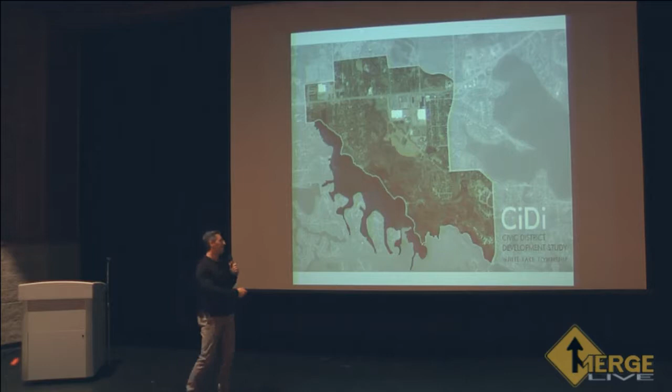We appreciate everybody being back again. For those who might be a little new to this, I'm just going to give a short introduction, and then Eric's going to get into it because there's actually a ton to cover.

The verbal presentation will happen this evening, and then we'll make this presentation available on the city website so you can go through it at your own leisure and study it more. There are also a few boards out there for you to look at tonight, just a snippet of what you're seeing in the slide presentation here. If you have questions about some things you're seeing, we'll be out there for a little while afterwards to familiarize you with anything.

So just to give you a feel of where we are in the process: we started this analysis phase in August, moved through, and had the first community meeting last month on September 13th. We got great feedback from that. If you recall, we presented some initial research and ideas about thinking about the community in general.

We put together two ways to participate. One was a survey, with questions about aspects of the community and potential desires through multiple choice or selected items. We also had an analysis where there was a map that people could put comments on in various parts of the city.

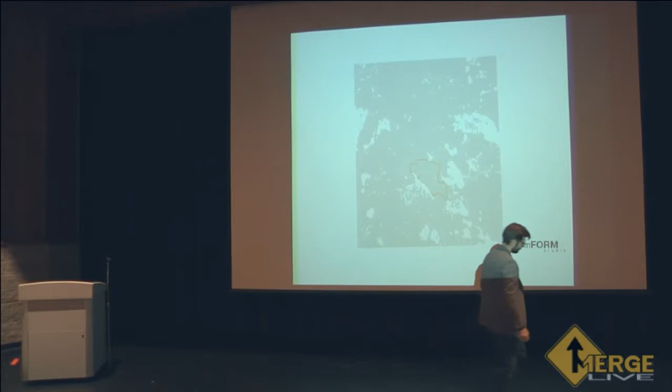Thank you everyone for coming out tonight. We're excited to present these three schemes and the results of the work, the input, and the research we've done so far, and the community feedback we've gotten. It's been really excellent, and I think you'll see that in the outcome of these three schemes, the wonderful opportunities available for this district.

Just to remind everyone, the district we're looking at is this area in the scheme of White Lake Township. So we're looking at a central area of White Lake Township that can potentially start to serve as a downtown identity point, a walkable community within the township.

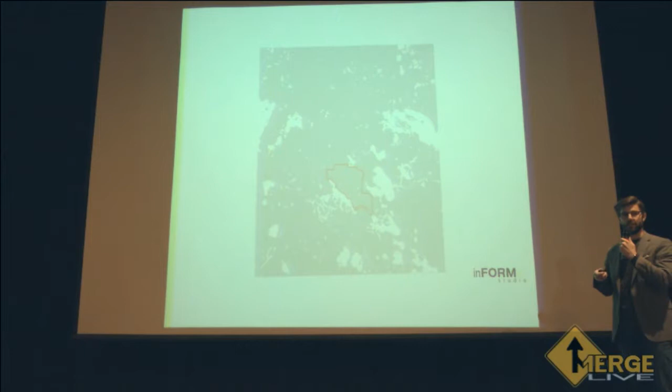Zooming in on the specifics, we are focused on the area right at the intersection of M59 and Elizabeth Lake Road. Right now we have the Kroger here and the JCPenney, so those are the landmarks that identify this area we're looking at specifically.

Part of the reason we looked at this area was the property down here that has been acquired by the library and the township to start developing a civic campus, looking at a new library building, potentially a new municipal complex, police, fire, etc. The idea is that this development would be a catalyst to look at the entire area as a master planning feasibility idea, so that it influences the development around it and starts to create a more walkable community that could serve as a potential identity for White Lake Township.

I want to get into a little bit of the feedback to summarize some of the important things we heard from the survey results.

We entered into this whole project with the idea, the notion, to look at this as a walkable potential downtown synergistic community that could start to form an identity for White Lake Township. So we wanted to reach out to the community and see your response to that.

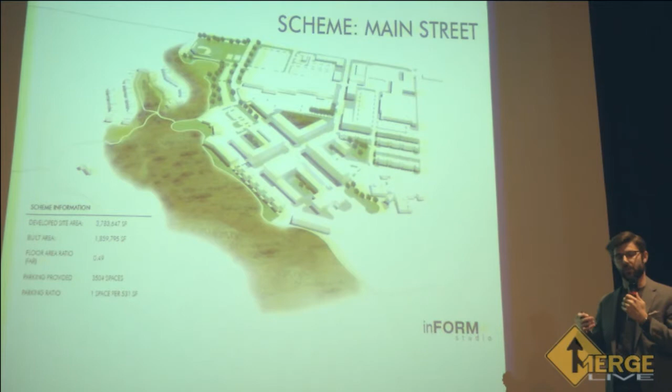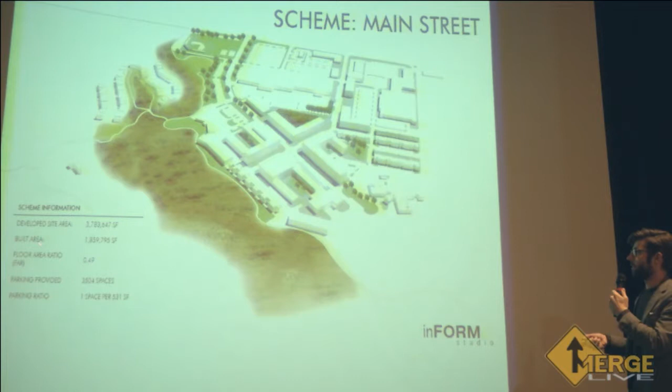The first scheme I want to talk about tonight is what we're calling the Main Street scheme. To summarize some information, the total site area we're looking at is about 3.8 million square feet with a built floor area of approximately 1.9 million square feet. That gets us a floor area ratio of about 0.5. When we talk about floor area ratio, we're looking at the comparison of built floor area to available site area. In walkable communities, the higher the floor area ratio usually means there are more doors on the street, access is closer, less distance between doors, and you get a general sense of more walkability.

The parking spaces provided in this scheme are approximately 3,500, which puts our parking ratio at one space to approximately 530 built square feet.

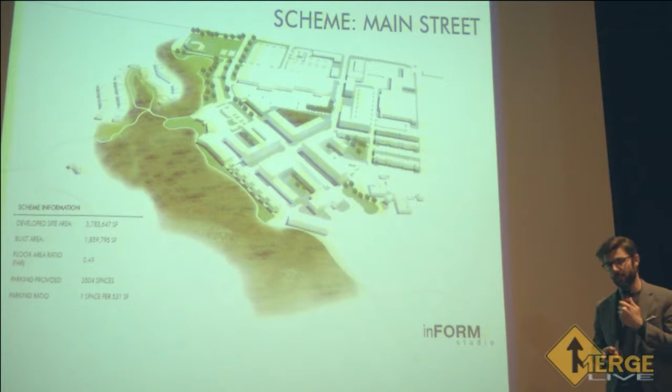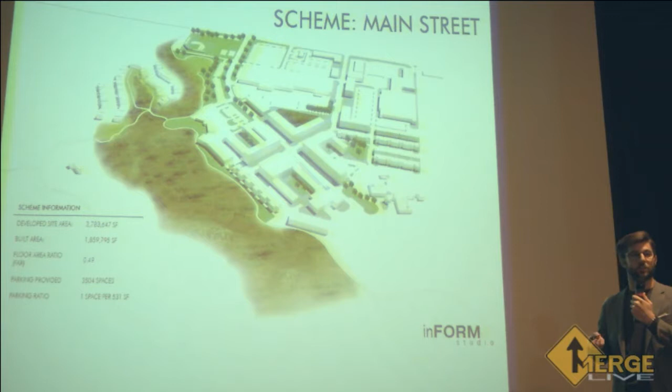When we look at parking for schemes like this that are aiming for walkability, one of the things we want to look at is right-sizing the parking. A lot of ordinances are geared toward making sure there's never a situation where a spot isn't available, which means most of the time 50 plus percent of the parking spaces are empty. So we're looking at a ratio a little higher than what you'd typically see in suburban ordinances, because we want to create more walkability and right-size those parking lots so it becomes more of a park-once district, where people park and then access a lot of different uses and features via walkability.

When we look at the conceptual framework for our Main Street scheme, what we focused on was creating a Main Street intersection between what is now the access drive for this development and Elizabeth Lake Road.

This is our main focus area, where we see the primary, most dense development. And then we bring in smaller Main Street feels, where buildings are close to the street, and they start to frame that as a walkable Main Street. You see that in several instances.

When you look at the three-dimensional iteration, you see how these buildings and volumes start to frame this as a street, creating a space outdoors along the street with the built volumes adjacent to it. This influences people to feel comfortable in these spaces, and they start to actually become public spaces.

One of the things we wanted to make sure we addressed in all of these schemes was connectivity back to the adjacent neighborhoods. We want to make sure we're not just touching these areas and leaving them isolated in a silo. We want to create connectivity back to the neighborhoods down here and over here.

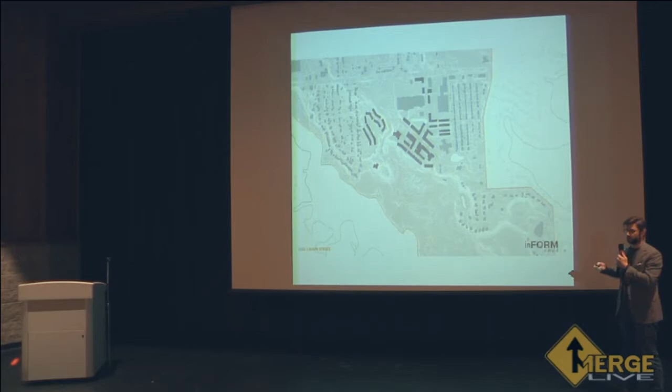When we bring in our new figure ground, you start to see that these built volumes define these areas and create spaces instead of those large, vast, open surfaces.

This is looking at the existing floor area ratio and land utilization as it stands today. Right now this district is at a floor area ratio of 0.17. In our schemes, we've looked to increase these floor area ratios to improve walkability. If you look at the land utilization, you see a big chunk is dedicated to surface parking and stormwater management.

What we've looked at in our schemes is really improving our floor area ratios, so we have about 0.5 in all these instances. When we look at land utilization, a much larger chunk is now dedicated to open area and building, and a much smaller chunk to surface parking. That's part of our strategy to increase walkability: reduce these large, vast surface parking lots and bring a more human, pedestrian scale into these areas.

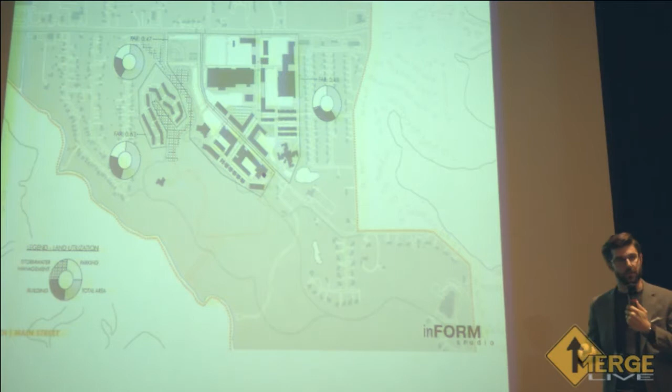For our stormwater strategy, we've retained the detention basin that's here and looked at using it more as an amenity, as opposed to a fenced-off area that only gets water occasionally. It becomes more of a landscape, water-based amenity that can serve as public space for the community.

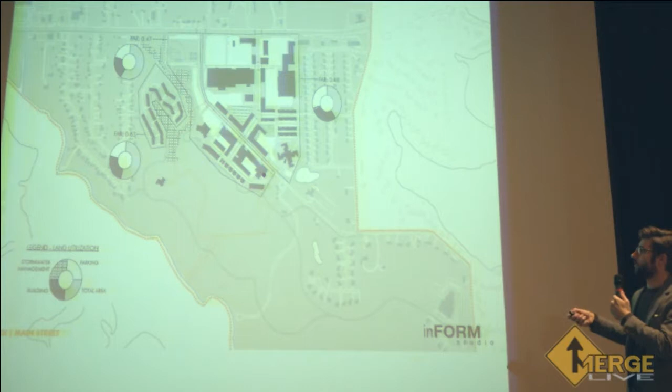Then we looked at taking a more holistic approach to stormwater management for the entire area, as opposed to each individual parcel dealing with stormwater on its own. That way the whole district can come together to create a more efficient stormwater management system, which can also be leveraged into an amenity for the entire district.

Because we're looking at addressing the parking situation, we wanted to make sure that if we're framing this as a Park Once district, that when you park here, you're able to get to a lot of things within a simple and accessible walking pedestrian district. So when you look at the available parking and the 5-minute walking radius, you see that through the distribution of parking areas, you're able to access the entire site through pedestrian mobility.

When we look at parking, you see that these smaller parking areas can really start to serve as a park once area, where then you have access to all of these uses from those lots.

We also looked at increasing the transportation mobility, slowing down and calming traffic while adding pedestrian mobility. We've created a strong network of grids that function with sidewalks on both sides, promoting pedestrian mobility. The proximity and density of these intersections act to calm traffic, so you're not having vehicles getting up to 35 miles an hour through here. Instead, you're slowing vehicles down to a 15-20 mile an hour speed limit, making this a safe and pedestrian-friendly area.

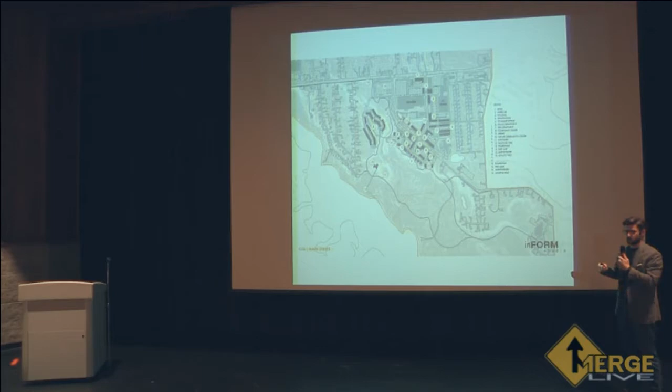Now, looking briefly, we're going to go through the programming here. This is at a zoomed out scale, so I want to touch on just a couple of things, and then we'll zoom in and get a more refined look at the programming we're proposing.

Like I mentioned before, we're looking at bike lanes that connect this corridor along Highland Road, and then connecting those to multi-use trails that connect the entire site and the entire district as a whole. One of the things we looked at is utilizing this high ground area as a potential spot for an interpretive nature center, immersed in the natural environment that exists through here. This allows us to create a connection point to the rest of the district and start to access the waterfront with a boardwalk that could be utilized for fishing and observing the waterfront.

When we look at the programming on a more zoomed in scale, you'll see that we've brought the height up with mixed use programming right at this intersection to define it as the main intersection and the defining point for the main street scheme. We've also brought a lot of our municipal functions into this area, so we have fire, police, and the township hall offices over here. We've put the library over here, on the site designated for it with its existing parking lot setup. Then we brought in some retail functionality through here, more mixed use to define this corridor, along with a couple of different housing options.

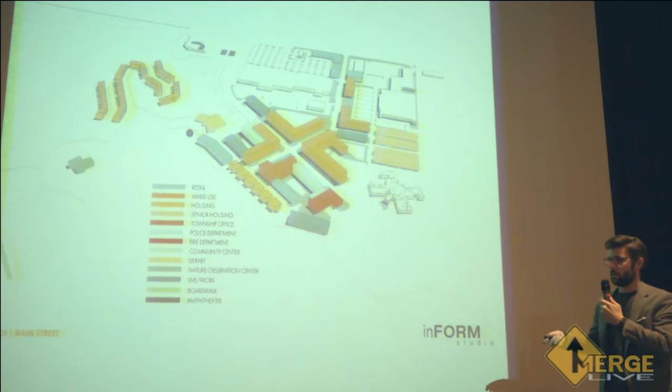And then looking at a housing development in this area. So for this scheme, we're looking at more of an apartment building type housing where you have several larger buildings that create this network and get you a higher density of units.

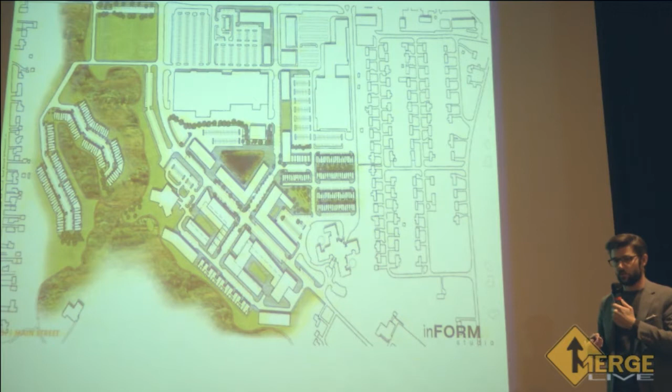And then just kind of getting a feel for the overall development. Like I said, we've maintained this detention area, but really made it more of an amenity. So you have these walks, this almost like a boardwalk type setup all the way around this wetland area that then serves as an amenity in a public space for this.

And we brought in some green park type spaces, and we really organized these central kind of front entrance areas as these green, almost like park type entrances. And then we've made these little public spaces that exist in between our developments here. And I also want to mention, in this scheme, we've set this area up for athletic fields.

And then all along this area where we have this existing kind of natural environment, we really emphasize that and brought the trail along that to define that edge where we have our development, and then we interact with that natural environment and make it as an amenity for the entire district.

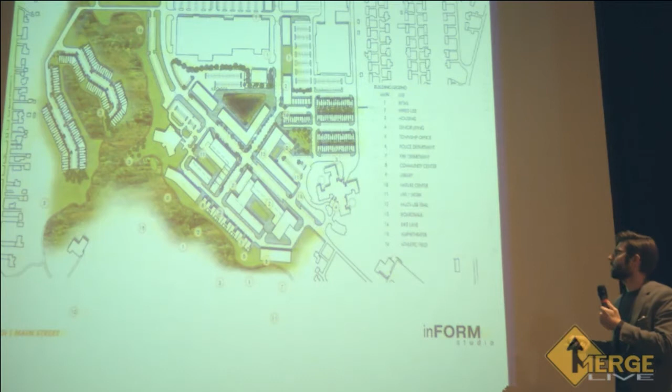Moving on to our next scheme, the scheme we're calling the Spine Scheme. Again, about 3.8 million square feet site area. This one is a much denser development strategy. We're looking at almost 3 million square feet of built floor area for a floor area ratio of around 0.77.

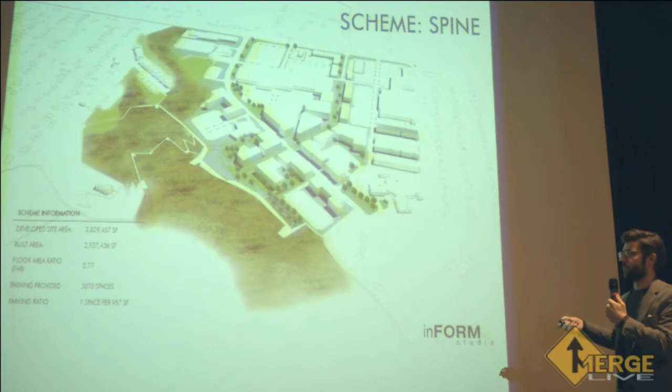A little over 3,000 parking spaces are provided in this scheme for a parking ratio of 1 space per 950 square feet. So this is probably on the most ambitious end of what's feasible for a Park 1 district as far as parking goes. In this scheme, we've really emphasized that the parking is not as important as creating these pedestrian-friendly corridors and spines.

Looking at the conceptual framework for how we developed this scheme, we dedicated this spine as a pedestrian-only connector spine. So this is layered as a public pedestrian space that also has built-in infrastructure. We've layered this kind of public space over top of this infrastructure function to really maximize the potential of both of those.

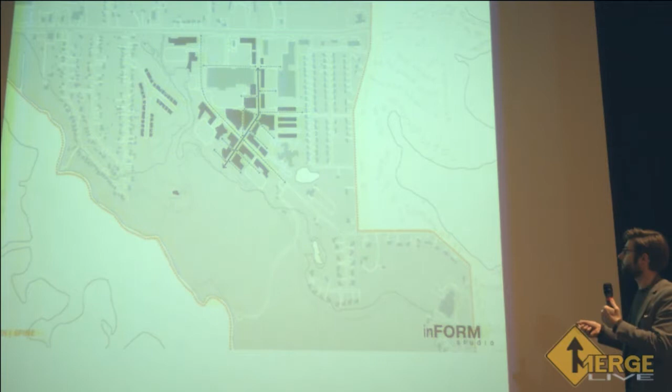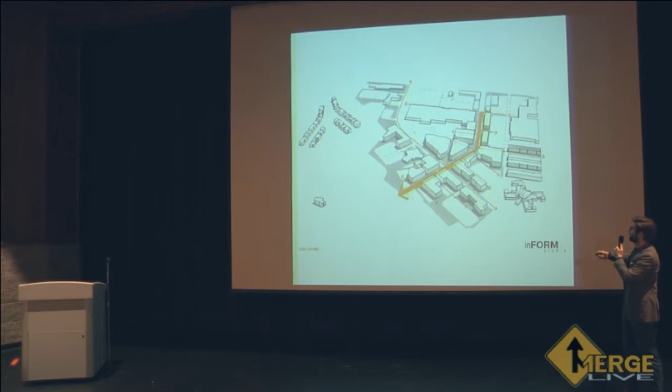And then we've set up these avenues that kind of filter all of the action towards this spine as our central organizing principle. And then when we look at the 3D, you can see how really we've reinforced that spine with our built volumes, and then carved through these spaces to really filter all of that traffic in towards that spine area as our central organizer and connector.

Again, similar strategies to make sure that we've connected this to our neighborhoods. And again, you see the kind of same strategy where we've used built volume to really start to define those spaces.

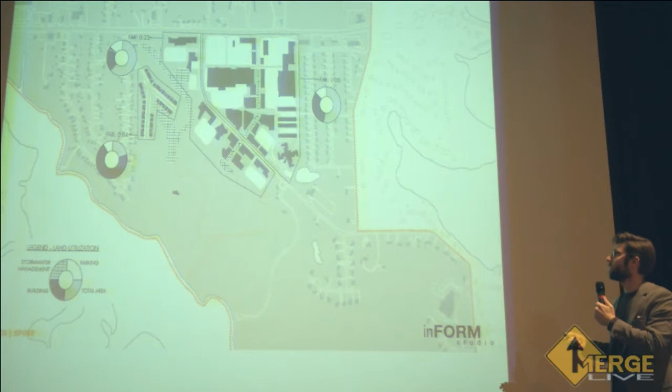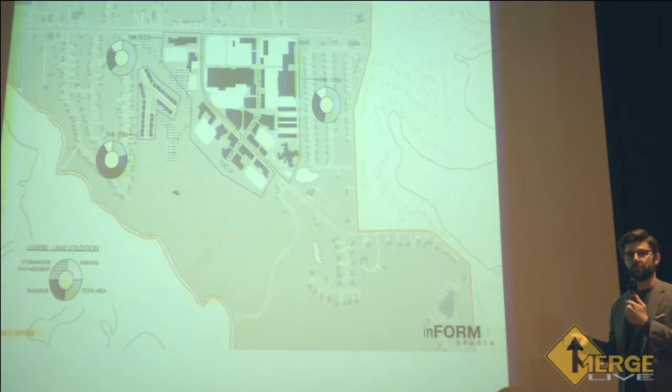Our floor area ratios, as you can see, are much higher for this. So within this kind of main zone, we were able to achieve a floor area ratio of 1. That's kind of the standard when you look at walkability. 1 is usually your goal for your floor area ratio, because that means that you have an equal floor area to lot area, and that really starts to maximize your potential for walkability.

These other areas we've gotten closer as well with the kind of density of the housing in this area, and then this area is more dedicated to some of our surface parking, and then a lot of more open areas, so our floor area ratio is much smaller in this scheme. But again, you see that the land utilization for parking is much, much lower in this scheme than even our previous scheme, and especially much lower than when we look at what we have existing.

Similar, just showing that we've provided these parking lots strategically in order to make sure that we have access to the entire site through your kind of allowable walkable area. And then you can see that we've really allocated all of our vehicular traffic to the outside and dedicated this central area to pedestrian access.

So this becomes a pedestrian spine that really organizes this entire framework and starts to connect everything back to our transportation network. Again, we've set up a multi-use trail that follows the contours of this natural edge and starts to work its way back and connect to the rest of the community.

The stormwater management for this scheme, like I said, we layered this pedestrian access and this public space over our stormwater infrastructure. So we brought in stormwater management areas that are focused on being amenities, so these are attractive and become strong public spaces. And then they feed back into this expanded wetland area that becomes an amenity as well, but really starts to serve the entire area.

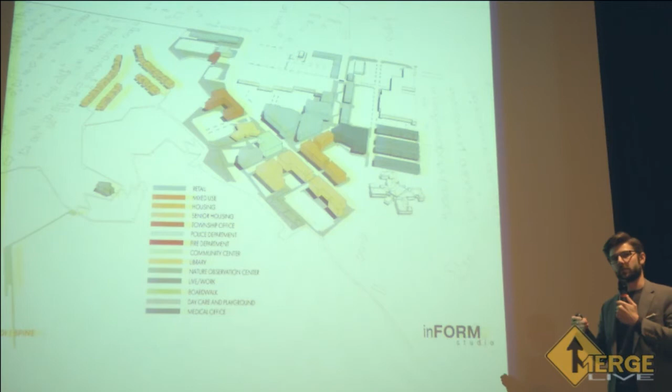For this particular scheme, our housing development in this area looks to respond to what is called the missing middle housing format. So most developed areas usually do okay at single-family housing and usually do okay at your higher density apartment buildings, but there's that missing middle housing where you're talking about quads and duplexes. So that's a strategy we looked at for this particular area, introducing some quads and duplexes into this housing development.

And then again, your nature center here on this high point, feeding back into your boardwalk.

You can see from the character of the scheme that you get a lot of very strong public space down this pedestrian spine. These little wetland areas really serve as amenities for all this public space as it filters down into your wetland area and then back into the entirety of the wetland system.

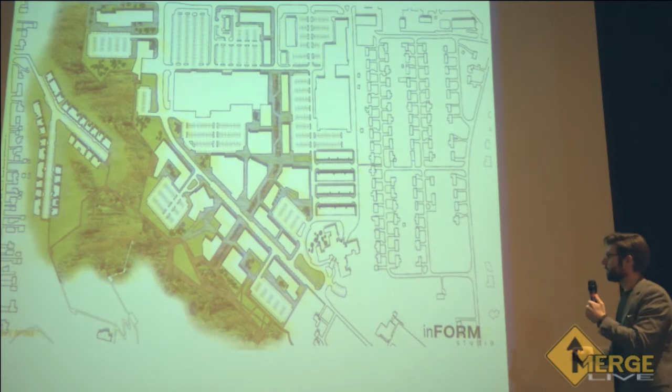You can also see in this scheme where we have a higher floor area ratio that there's a lot less area dedicated to surface parking. So we have our surface parking lots here, but then there's a lot of public space provided in these areas.

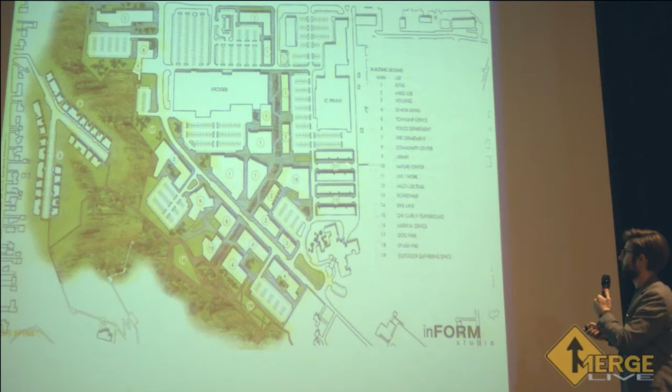Looking again at some of the programming specifics, you have your live-work units, your library in this area with this public space like we talked about, and then connecting back to a lot of these public spaces along this route.

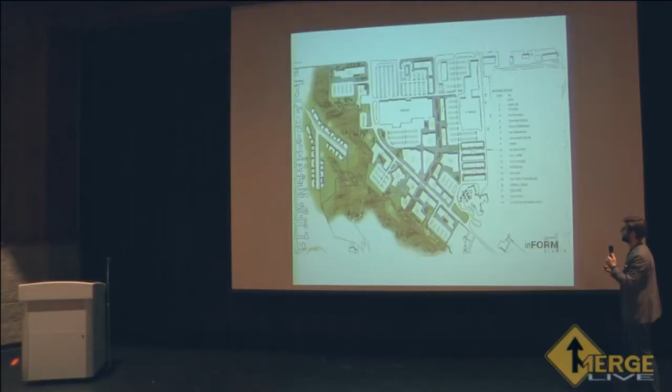The last scheme we're going to present tonight we're calling the pocket scheme. Just some information on the scheme: again, we're about 3.8 million square feet of site area with about 2.6 million square feet of built area, so our floor area ratio for this is 0.68, a little less than our previous scheme, but still getting closer to that 1.0 goal.

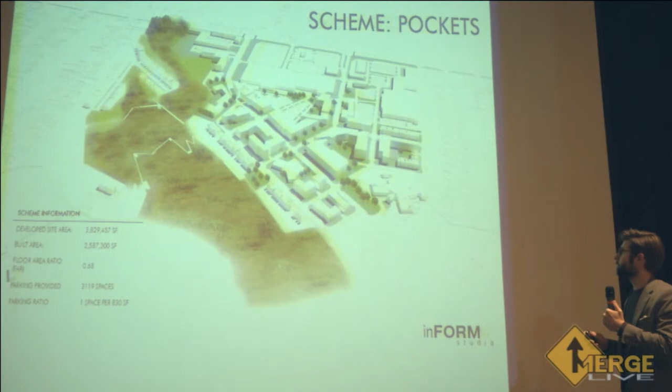The conceptual framework for the pocket scheme was really based around creating small pockets of public space that can start to form a network throughout the district. So you're traversing small distances to get to these active public spaces that can really start to create a stronger sense of public life in this district.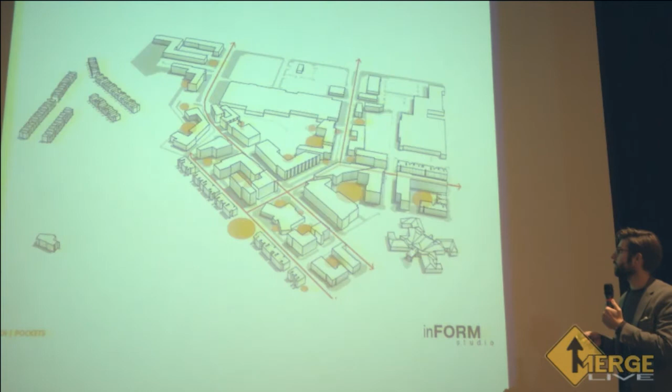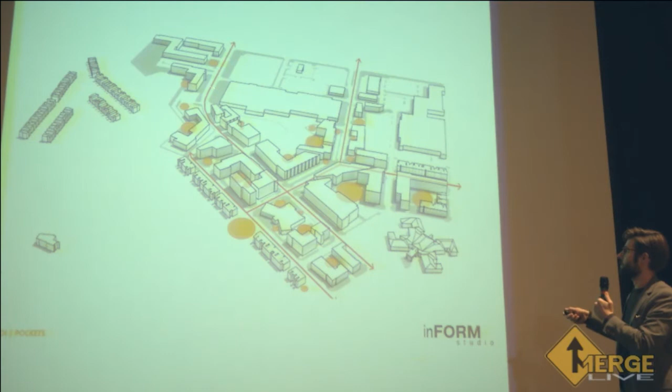And when you look at that in 3D, again, you see that these building volumes really start to form these spaces that can then serve as playgrounds, can serve as outdoor gathering spaces, can start to serve as splash parks, etc. And they are all networked together to create this really dense system of connected active public spaces.

Again, making sure that we're connecting everything back to the adjacent neighborhoods so that the development doesn't become a silo. And then you can see, especially in the figure ground, these little pockets that are created with our built volumes.

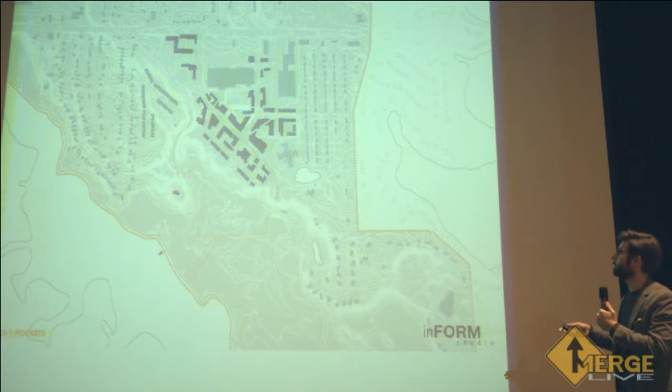Again, our floor area ratios - this particular scheme, we're not as dense for our housing development over here, but again, we get pretty close to our 1.0 goal in this main development district, and you'll see that a much smaller portion of our overall land utilization is dedicated specifically to parking.

Again, making sure that our park-once strategy provides connectivity to all the areas that we're trying to serve with our strategic location of these parking areas.

And then if you look at our transportation, we've created a really dense network of these transportation areas that work to, one, calm traffic and provide connectivity so that anyone who parks over here would then have a very connected route back to any of these programming spaces over here.

Stormwater strategy for this scheme: again, we don't actually provide any surface stormwater management outside of our centrally located stormwater management for this scheme. Potential opportunities for stormwater management can be underground, under the parking, which is a fairly common strategy - temporary storage that then filters back into your central stormwater management, so those are options to get back to this main stormwater amenity.

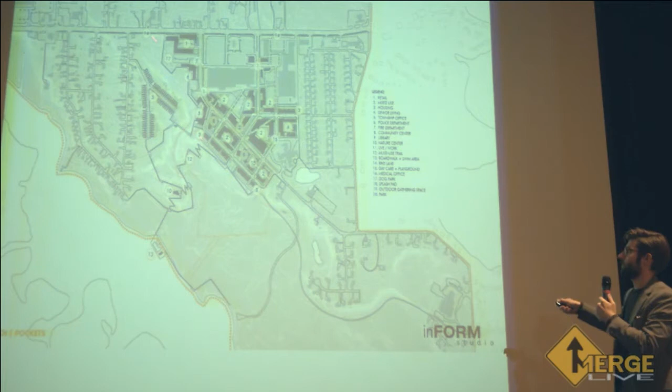When you look at this scheme, again, we have a lot of mixed use along this street, and that's really to provide a lot of impact at the street level with retail, and then provide opportunities for potential office or residential above in these areas.

For this particular scheme, we've looked at senior housing in a couple different forms, right adjacent to this long-term care, where you have more of a multi-unit type, almost like an apartment building type framework, and then more of a townhouse type framework. And then that feeds into more housing opportunities.

Not necessarily senior living, but more housing opportunities that fit into that townhouse or multi-unit condo typology. The housing for this scheme is more of a single-family attached unit, so it's a little denser than the spread out housing that's here, but similar in scale as far as floor area, providing a very strong pedestrian feel along the street.

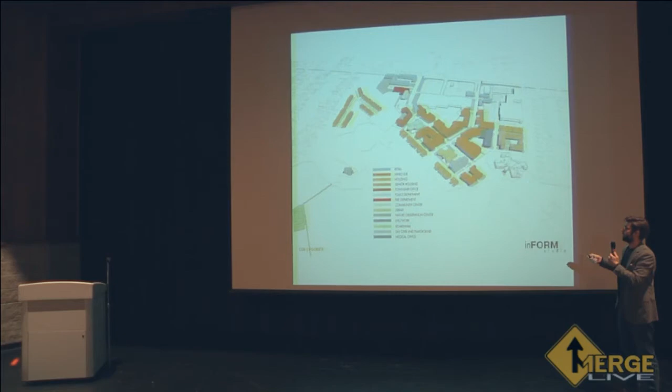And then looking at more of our municipal uses, we've brought the township offices into this corner to really define this edge, and the community center here, so they can really utilize a lot of this potential retail that goes into these mixed use areas.

We've looked at the library in this location to really maximize the visibility right at this intersection and capitalize on a lot of opportunities for these public spaces, as well as adjacencies to potential retail opportunities for coffee shops, etc.

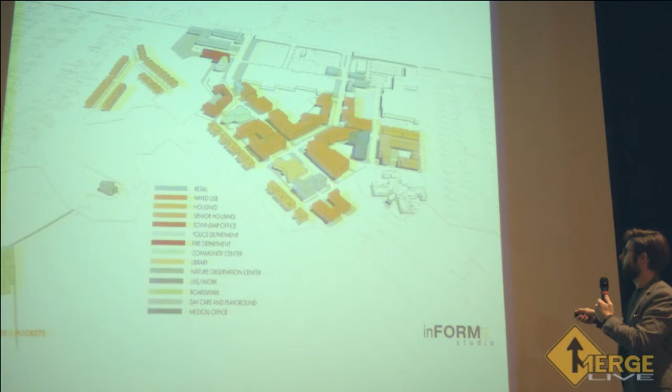We've looked at daycare opportunities, both adult daycare and child daycare here, with the public space behind that could potentially be used for a playground and create some intergenerational opportunities here.

Capping it all off with some mixed use, and then defining this edge with some condo type, townhouse type housing to really define this edge and start to create views back into this natural area.

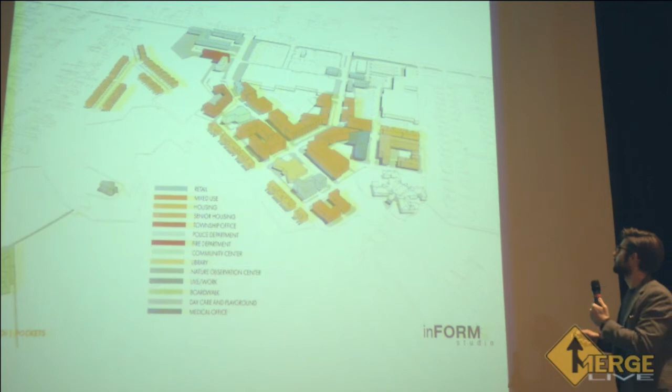Looking at the character of this scheme, you can see there's a lot of public spaces that are provided with the green and the paved surface, or the hard surfaces, and these really create opportunities for a lot of public spaces.

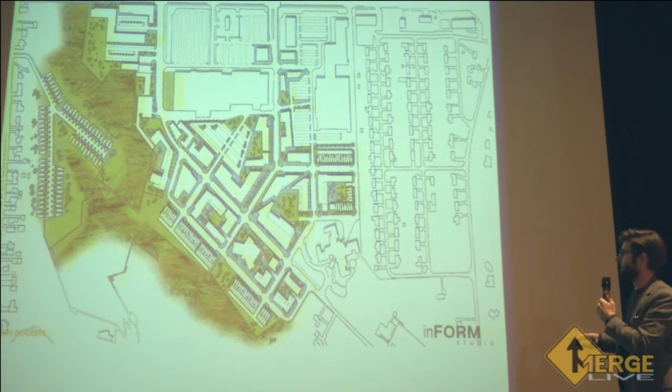For this particular scheme, you don't see a lot of surface parking, and that is because we've tucked the parking underneath a pedestrian deck. Because of the topography along this edge, we're able to treat these almost like a walkout basement, but for parking.

So there's access into the parking from these lower levels that are then open air, but this street level provides public spaces.

Again, you see this large area of green that can be dedicated for a dog park, and then this natural edge that really starts to define that interaction.

Looking at some of the programming for the public spaces, we've looked at a playground in this area adjacent to the library, and a lot of the residential opportunities.

Again, we mentioned the playground that could go in here, and then a lot of park opportunities for these areas, outdoor gathering spaces that could potentially have outdoor fireplaces, benches, seating, etc.

We looked at potentially a splash pad in this area that really can connect back to the community center and the township offices here. And then the housing for this scheme, again, more of that single family, but focused more on an active pedestrian street.

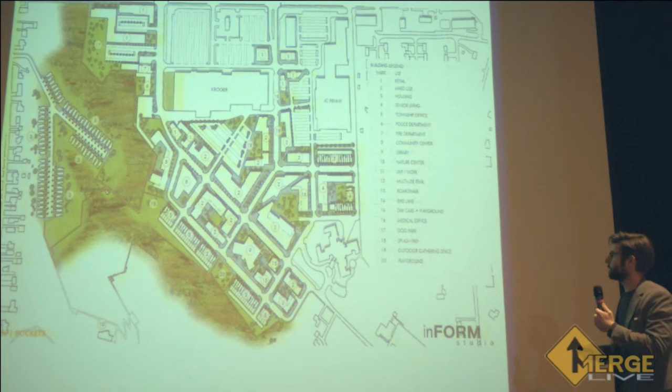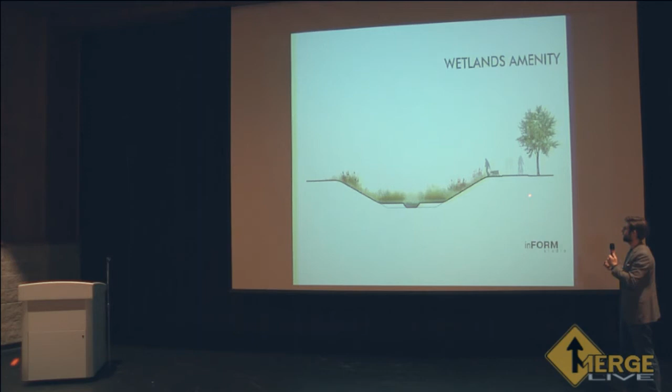Again, I talked a lot about the stormwater management as a potential amenity. So when we look at the stormwater amenities, this is kind of the form you're looking at, where you have these public spaces that are directly adjacent to these systems that provide a lot of potential for wildflowers and natural grasses, and really serve as infrastructure, but act to create a very strong, beautiful public space.

And then even more ambitious when you get into those lower areas where you look at potential boardwalk paths that go through the stormwater system with opportunities to really engage with nature, and then potential sculptures or other types of public engagement opportunities.

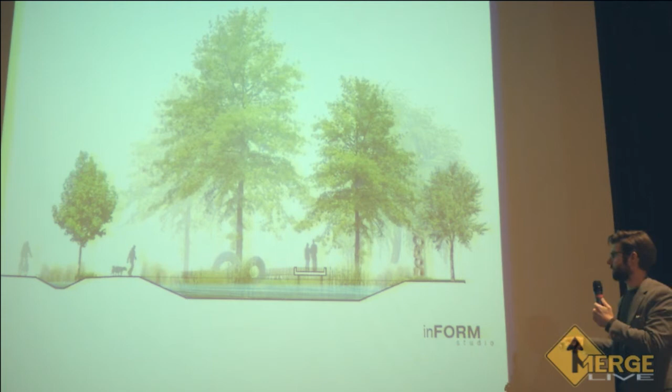That concludes the presentation of the three different schemes. We're looking for feedback focused on the aspects of each scheme that worked really well, or the concerns you had with each, so that we can respond to those individual items and synthesize one scheme that capitalizes on the best parts of each.

We're going to provide an online survey similar to the one taken during the analysis phase. That link will be available tomorrow at the end of the day, and on the flyers provided in the back that you can pick up on the tables as we exit. By end of day tomorrow we'll have that up, along with a lot of the graphic information you've seen tonight, to respond to the elements you thought were most successful or gave you the most concern.

That concludes my end of the presentation. I'm going to turn it over to Mike so he can wrap it up, and then we'll meet up outside and answer any questions.

Great job, Eric. We appreciate that.

I just wanted to reiterate a couple things. When you see this, we recognize that the plans are fairly ambitious, right? This is a fair amount of square footage, a lot of buildings, a lot of infrastructure. The idea behind this is we're looking at 20, 25-year type plans, possibly longer. So in terms of phasing, this isn't something like we anticipate it looking like this in 2 years, 3 years, 5 years.